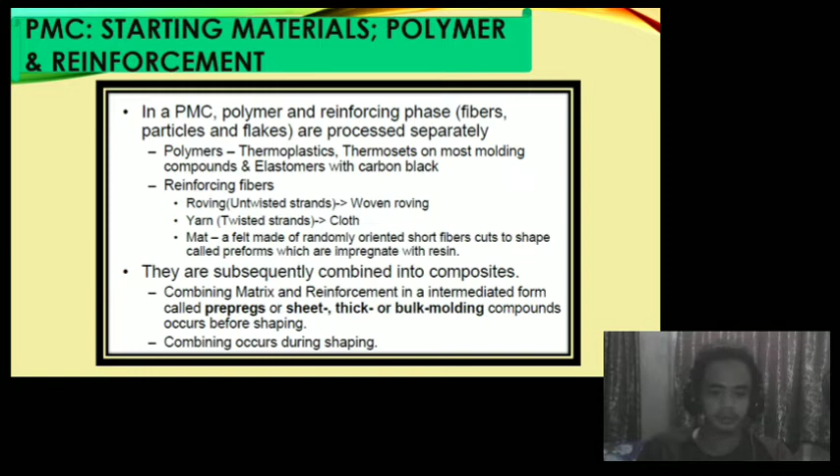So, in PMC there is a process of shaping the materials. It is called the FRP composite shaping process, and it is divided into two classifications: open molding and closed molding.

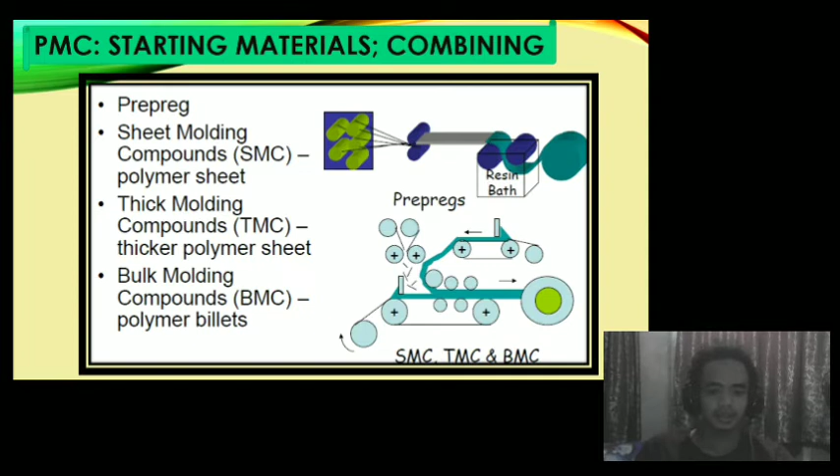So what is open molding? In open molding, parts are exposed to air as they cure or harden. Open molding utilizes different processes including hand layup, spray up, casting, and filament winding.

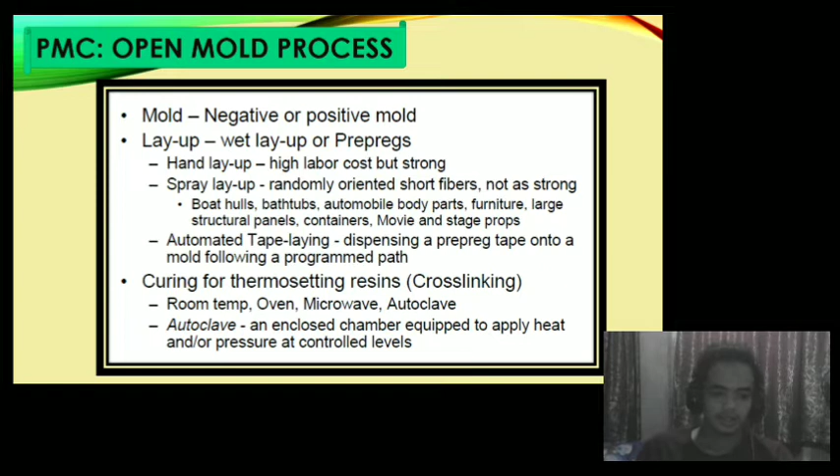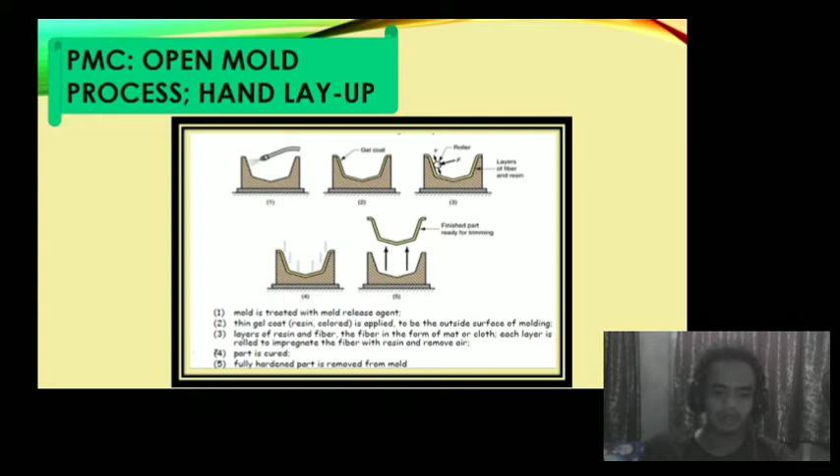So, hand layup is the most common and least expensive open molding method because it requires the least amount of equipment. Fiber reinforcements are placed by hand in a mold and resin is applied with a brush or roller. This process is used to make both large and small items, including storage tanks and showers.

So next is spray up. Spray up is similar to hand layup but uses special equipment, most notably a chopper gun, to cut reinforcement material into short fibers, add them to resin and deposit the mixture onto a molding surface. Spray up is more automated than hand layup and is typically used to produce large quantities.

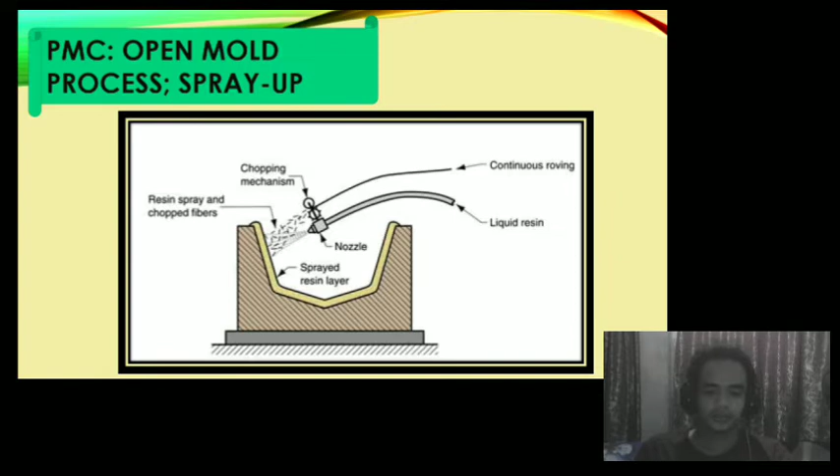Filament winding. Filament winding is an automated process that applies resin-saturated continuous fiber reinforcement onto a rotating cylindrical mold. It is used for creating hollow products like rocket motor casings, pipes, stacks, and chemical storage tanks. Filament winding is less labor-intensive than other molding processes.

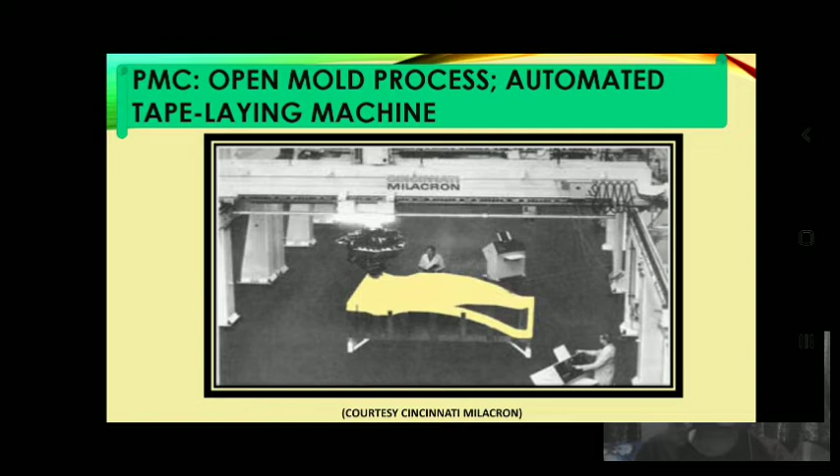In closed molding, it is cured inside a two-sided mold or within a vacuum bag. Closed molding processes are usually automated and require special equipment, so they are mainly used in large plants that produce huge volumes of material, up to 500,000 parts a year.

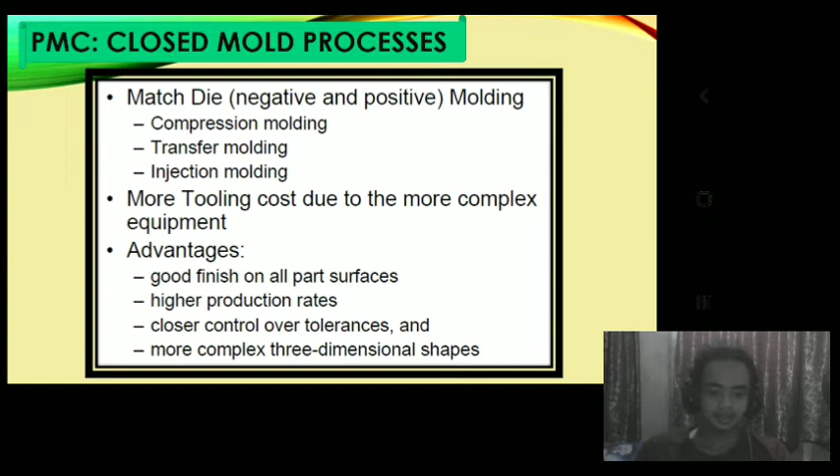An example of the processes is resin transfer molding. Sometimes it is called liquid molding. It is a closed molding method in which reinforcement material is loaded into a closed mold. The mold is clamped and resin is pumped in under pressure. This process produces complex parts with a smooth finish on all exposed surfaces.

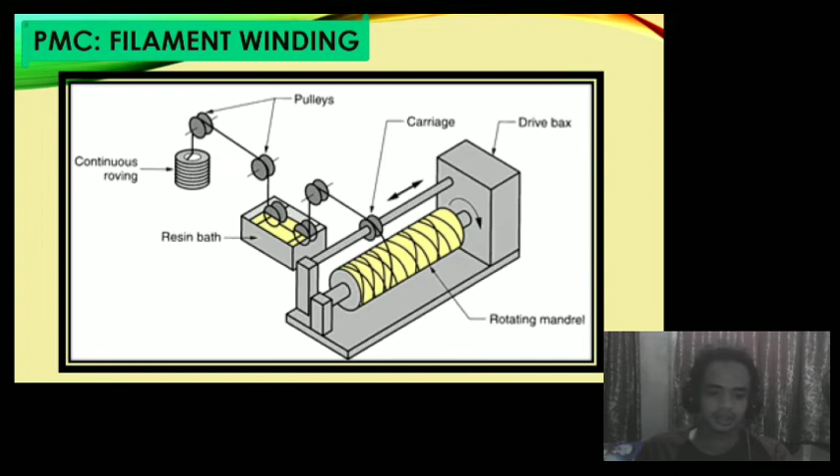The process can be simple or highly automated, and cycle times are speedy by laying up reinforcement material dry inside the mold. Any combination of materials and orientation can be used, including 3D reinforcement.

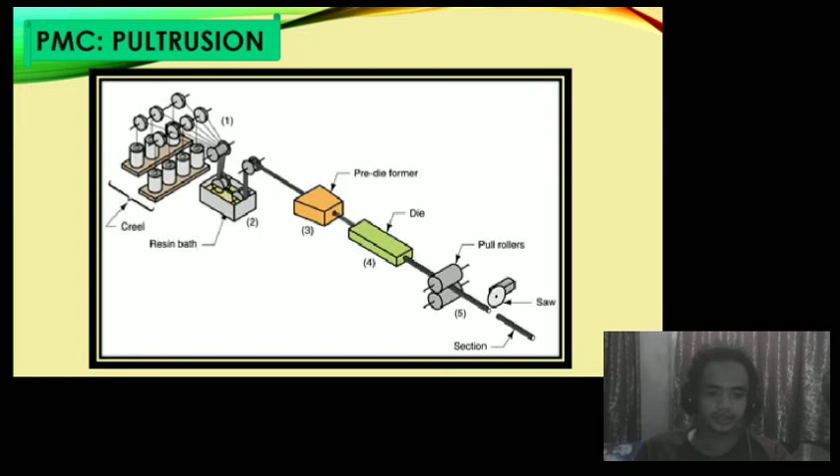Next is compression molding. Compression molding is a manufacturing process in which composite materials are sandwiched between two matching molds under intense pressure and heat until the part cures. This technique is used to rapidly cure large quantities of complex fiberglass reinforced polymer parts.

Compression molding features fast molding cycles and high part uniformity. The process can be automated. In addition, labor costs are low and it provides design flexibility and a nice surface finish.

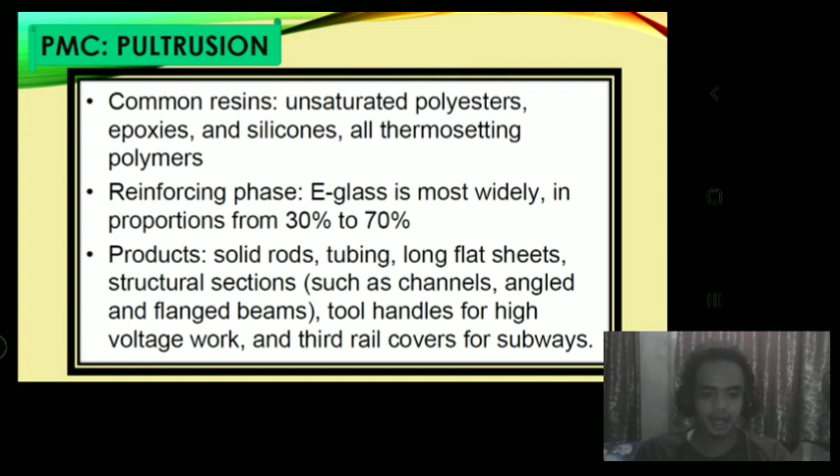And lastly is pultrusion. Pultrusion is used to form composites into long, consistent shapes like rods or bars. Continuous strands of reinforcement are pulled through a resin bath to saturate them, then pulled through heated steel molds that sculpt the composite into continuous lengths.

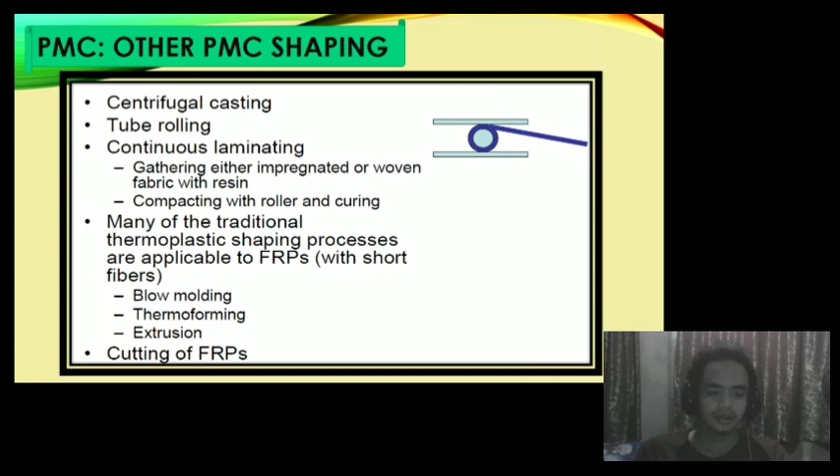So, cutting methods of uncured FRPs. Cutting of FRP laminated composites is required in both cured and uncured states. Uncured materials must be cut to size for layup, molding, etc.

Typical cutting tools: knives, scissors, power shears, and steel rule blanking dies. Nontraditional methods are also used, such as laser beam cutting and water jet cutting.